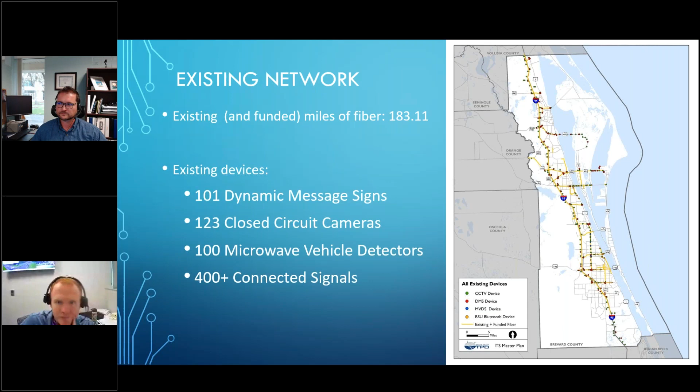That's just a quick overview, but I have a video here that will do a better job of explaining ITS and some of the things that could be coming down the pipeline than I do.

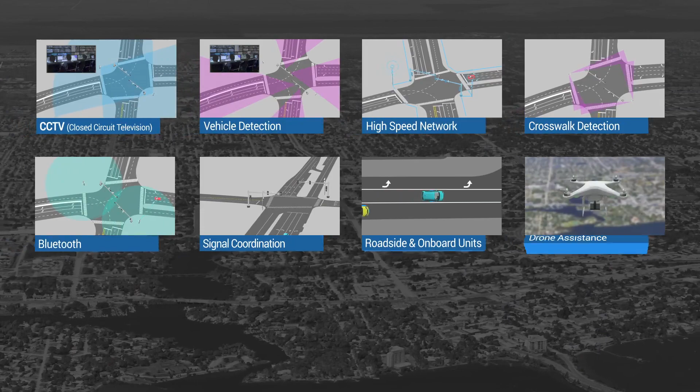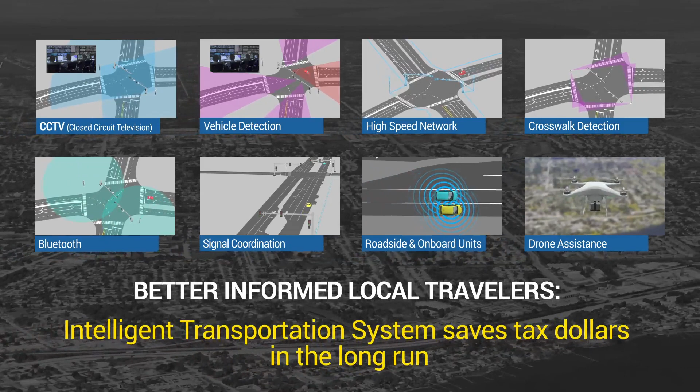Space Coast Transportation Planning Organization here with some technorific news about the current state of our area's growing intelligent transportation system, and how our tax dollars can transport us into a safer, more money-saving, and connected future. All of the intelligent transportation technologies we'll see, current, coming, and future, enable our local travelers to be better informed and make safer, more coordinated, and smarter use of transportation networks while saving money, fuel, and time. Most importantly, our intelligent transportation system will save our local tax dollars in the long run. We'll look at the technologies that are currently deployed, the new tech that's already on the way, and some future tech that's truly game-changing if we choose to adopt it.

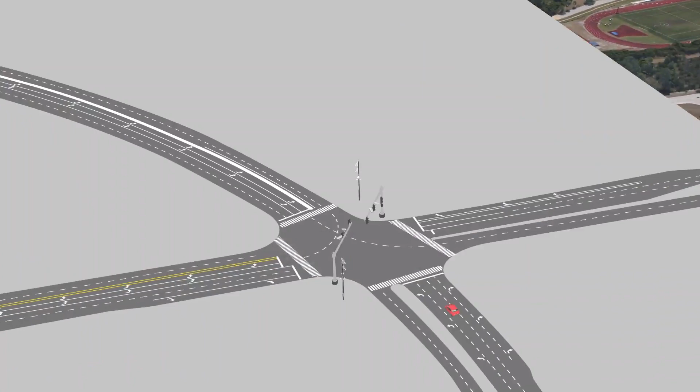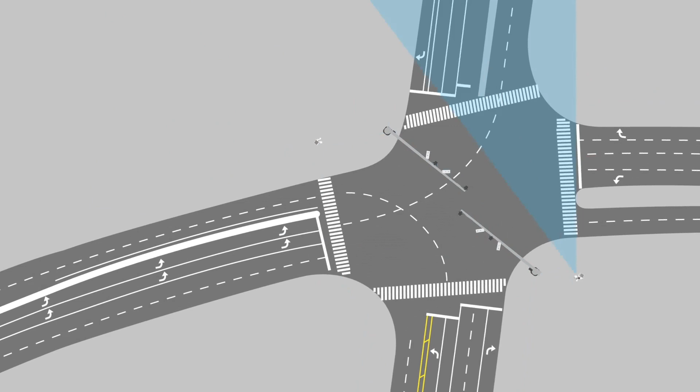Let's take a little trip to a local intersection and look at the technologies currently deployed there. Here, we see the intersection of Pineda Causeway and Wickham Road. Let's look at our already deployed closed-circuit television, known as CCTV, and vehicle detection sensors working alongside the high-speed network beneath our feet, and then add in the future possibilities. There's more to our intelligent transportation system than meets the eye, as CCTV allows traffic management staff to get a real-time look at traffic flow and watch for accidents. Vehicle detection with its special sensors automatically detects the presence of vehicles and obstructions on the roadway and instantly warns the management center.

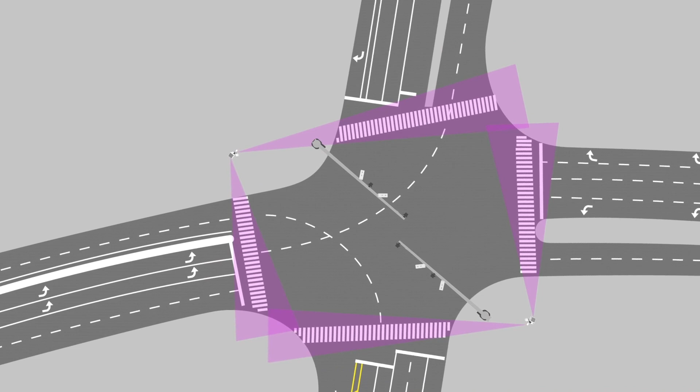Meanwhile, our already on the way crosswalk detection software will use similar vehicle detection sensors to check for people in the crosswalk and warn oncoming traffic day or night and in all weather conditions.

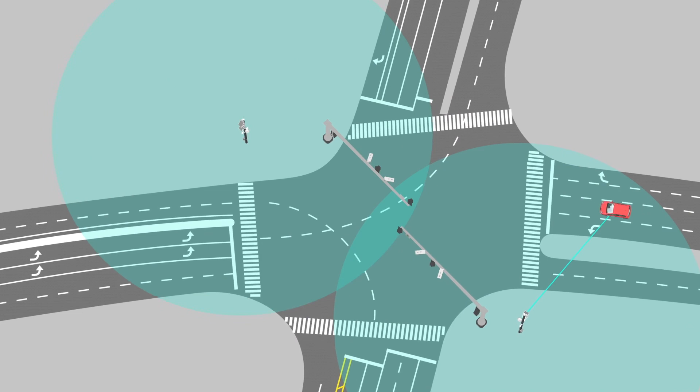Now let's add in some other existing possibilities like Bluetooth technology, which can detect the speed of vehicles entering and exiting the roadway. The Traffic Management Center now not only sees the intersection, but has much deeper traffic flow data to use for safety and roadway improvements.

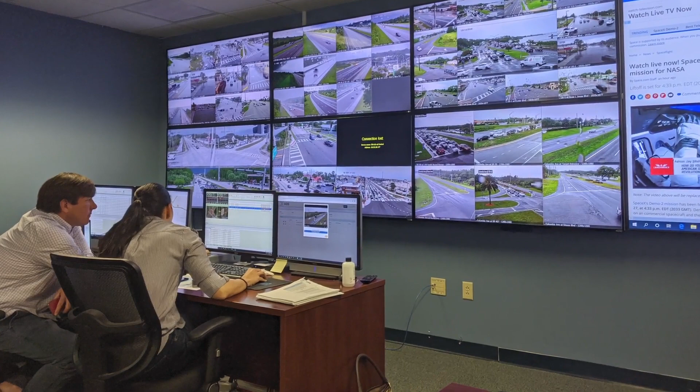Speaking of traffic management centers, our new traffic management center is being envisioned as we speak. We're really excited about it. It's the brains of this entire operation, after all.

Let's travel to another location and look at some more future possibilities. This is the intersection of US 192 and Hollywood Boulevard. In addition to the technologies we've already seen, this intersection employs another modern technology called signal coordination.

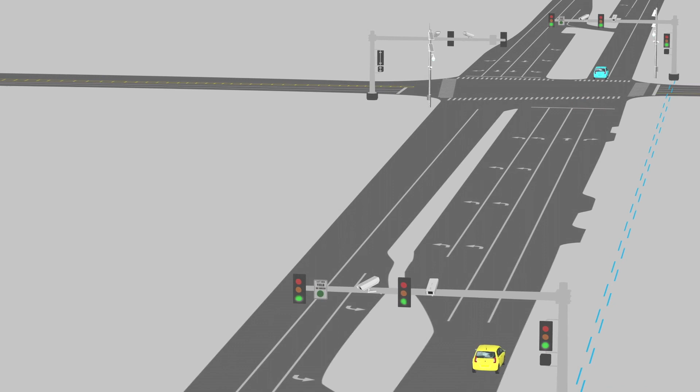Signal coordination uses the vehicle detection sensors to allow other intersections upstream and downstream to communicate with each other and work together to predict traffic flow and adjust the signals, improving traffic flow and saving travelers even more time and money.

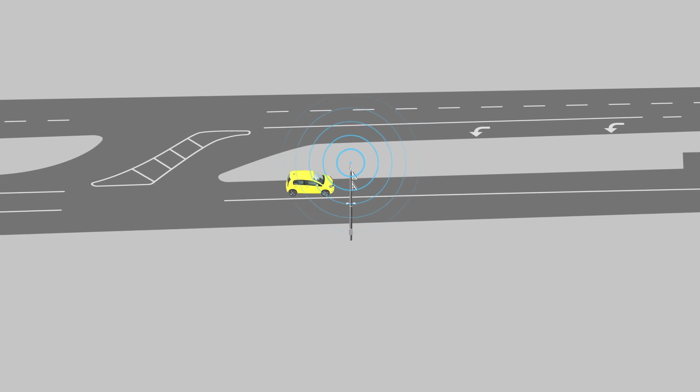With the addition of roadside units, direct communication with vehicles becomes possible, providing instant traffic notifications like red light wait times. And with onboard units installed in vehicles, the possibilities are even greater, as vehicles could then communicate directly with each other and the surrounding infrastructure, increasing travel efficiency, safety, and hopefully less road rage.

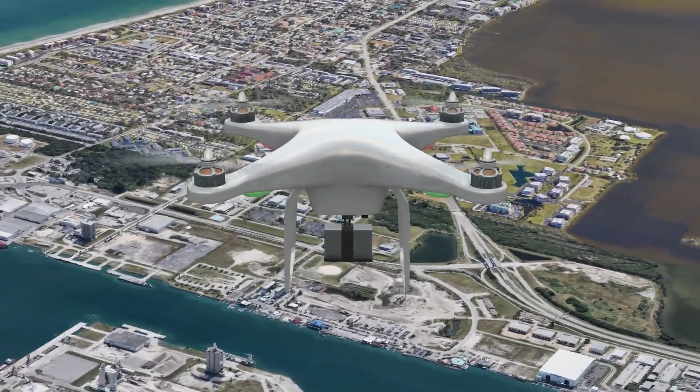And of course, high above the hustle and bustle, next-generation drones could not only ferry our online purchases, but provide first responders a bird's-eye view of accidents, or even provide updates to your smartphone about foot traffic at a concert, festival, or rocket launch. Of course, new technology is an investment.

Our hardware must be updated, maintained, and secured in order for future components to integrate seamlessly, in the same way that we wouldn't hook up a supercomputer to a dial-up internet connection.

In the present and in the future, all of these technologies acting together increase safety, optimize our existing infrastructure, and save taxpayers time and money.

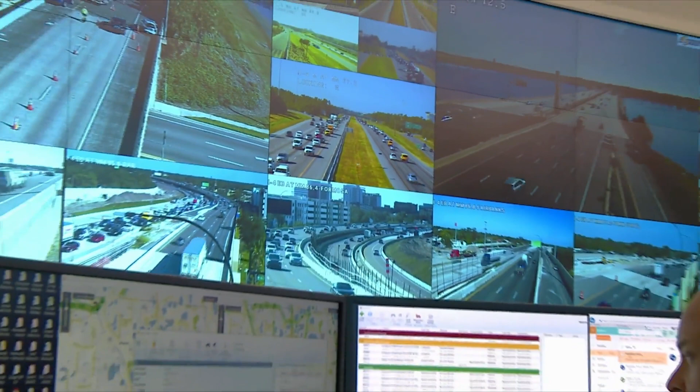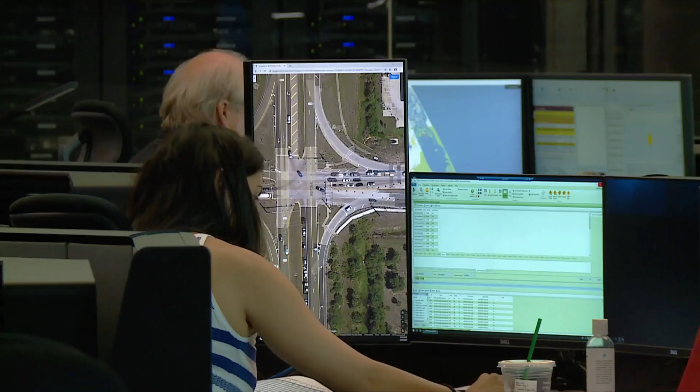24 hours a day, 7 days a week, operators at the RTMC monitor traffic conditions on 795 miles of freeways and state roads. Live feeds from hundreds of traffic cameras and data sensors provide information on traffic flow, average speeds, travel times, and incidents. If a crash occurs, the RTMC operators work to minimize congestion and secondary crashes by quickly

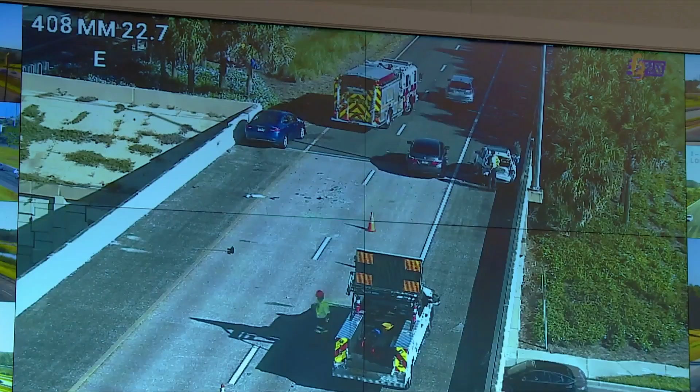dispatching road rangers and communicating with police, firefighters, and medical responders. When there is an incident on a major roadway, drivers may detour to arterial roads. The RTMC operators have the ability to adjust traffic signal timing, keeping the traffic lights green longer to help facilitate the increased volume of traffic.

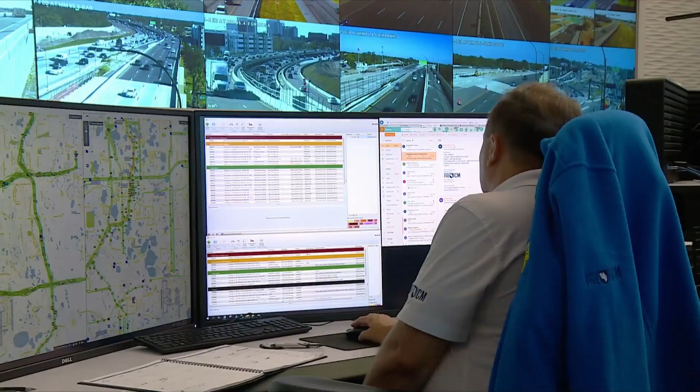Using the latest technology, monitoring the roadways, keeping drivers informed, this is how the Regional Transportation Management Center is making our roadways as efficient as possible. For more information, visit cflsmartroads.com.

Videos are great, especially for the public to get a good idea of everything that goes on in easier ways. So that's another video that can be shared.

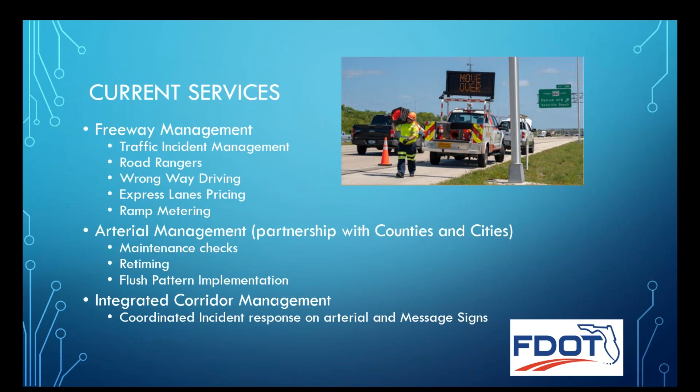I think you're still muted there. Thank you, sir, I appreciate that. Sorry about that, guys.

So going ahead and taking a look at the services that we currently offer from the Traffic Management Center, we generally break this down into three different categories: freeway management, arterial management, and then integrated corridor management.

On the freeway management side, really the bread and butter that began the program was incident management. We share information with FHP, they share CAD information and let us know when they see crashes. We use our cameras and sensors on the roadway to determine where crashes are actually occurring, then share the video back to them to help dispatch the right equipment to the right location. You'd be surprised how often drivers indicate they're on the wrong side of the roadway, or how often they send us information that they may be miles off from where they're actually located.

For especially severe crashes, we coordinate to close ramps in order to bring fire responders in potentially from a wrong-way direction, so they can access the incident safely. By keeping an eye on the roadway, we're able to coordinate and quarterback a lot of the work going on in terms of incident command.

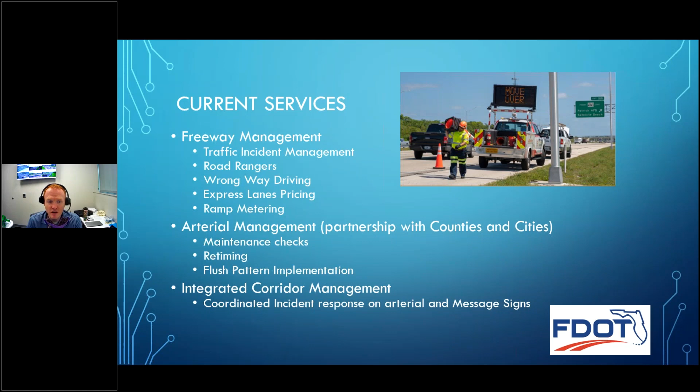So I mentioned all this happens through partnership. We go ahead and work together on a regular basis. We share communication. There's actually some slides in some of those presentations that talk about that high-speed connection between it. I don't get any information from traffic signals directly, I get all of that through the other TMCs. And then when we look at getting information about what's going on the freeway, that comes from the department over to the local agencies.

We go ahead and also share software. So I don't have my own license to things, they don't have their own license to things. We share things amongst each other in order to make it more efficient, more cost effective for the public.

The other thing that we really have done is been able to share lessons learned when we're deploying this new technology. As you can imagine, as many times as you may have tried to go ahead and set up new technology at your house, it's the same kind of condition. There's lessons learned in each deployment about what we can and can't do, and we get together and make sure that happens regularly, making sure that we're all learning the lessons one time rather than having to do it with each new project or with each new agency. Do you want to go ahead and jump to the next one, Stephen?

When we start looking at emerging technology, some of that was in Stephen's video talking about connected vehicle. That's one of the biggest things that we've looked at investing in from the FDOT side. We've already set our center up to handle the data management, so we've been able to scale out to have enough server space in order to take care of this. For a comparison, our old center used to have around 4 to 5 racks of space. The new one has around 35.

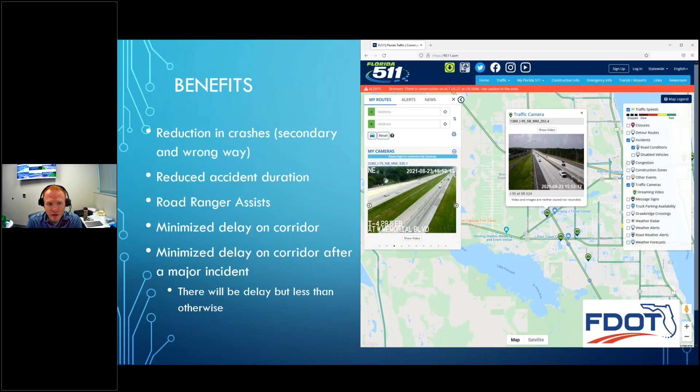When we start looking at the challenges we face, certainly all of this work is complex and it's an ever-changing environment. As you've seen, we try to put mitigation measures in place through regional communication, and by making sure we're making strategic investments in the right technology.

One of the challenges we've seen, not just statewide but across the US, is staffing. You have great staff here with the local agencies, but being able to retain that staff and making sure they pass on knowledge to the next group coming in is a key factor in keeping these systems up and running. None of this technology runs itself. It takes a very qualified professional to keep it moving, and oftentimes it takes a team to make these things happen.

The other thing you look at is that TMCs in the past were built with siloed roles and responsibilities. As those have forked out and there's more and more we can do with technology, you have to make sure you're looking at a center built for the future, one that considers emerging technology and handles those expanded roles.

Sorry, Stephen, you want to jump to the last slide? If you want to learn more about what's going on within FDOT, we've got a lot of information on our website, referenced in the video: cflsmartroads.com. We try to put as much information as we can and provide access to the data being captured by these centers so you can see it for yourself. With that, I'll pass it back to Stephen. Thank you all very much.

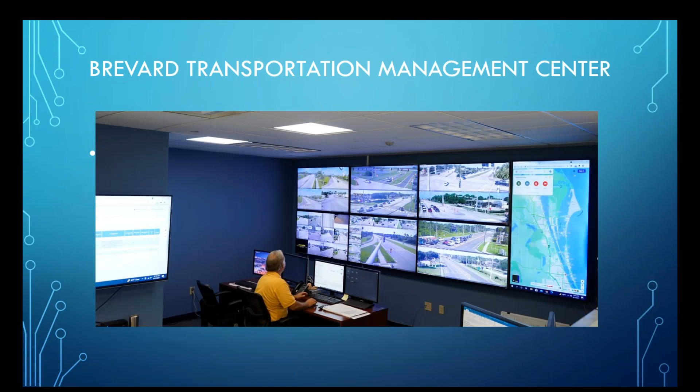Great, thank you, Jeremy. As you can see, there's a lot that goes on behind the scenes at the regional level. Now getting down to the county level, we'll hear from Mr. Rich Adaman with Brevard County. He is the Intelligent Transportation Systems Operator and Network Systems Administrator. So Rich, take it away.

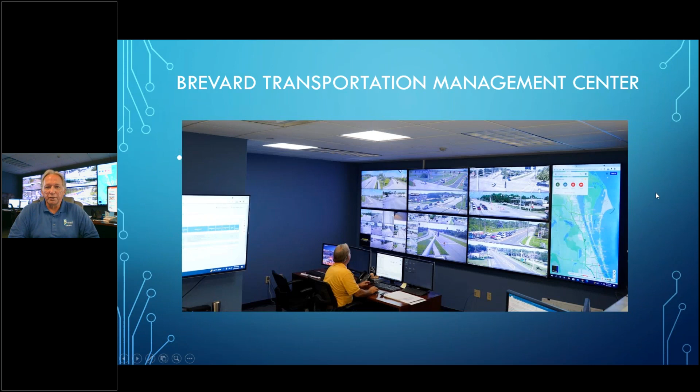Good morning everyone, thank you Stephen, and thank you Jeremy for the great information you provided. Jeremy touched on a lot of great points, and I'll be reiterating some of those. I really appreciate the partnership we have with the local municipalities along with the DOT. I'm going to give a brief overview of our signal operations and also our TMC operations.

Brevard County's traffic operations service area is from Mims to Sebastian. Brevard County is 72 miles long, covering 1,554 square miles total, so it's quite a bit of area to cover. Our signal shop group is currently located in Merritt Island, although we're moving to a new facility, hopefully in the November-December timeframe, which will be on the mainland. So we'll get off the barrier island and have a better area to work out of, located right around the new Pineda overpass, Pineda Causeway.

Currently our signal shop group has 8 folks working within it, with 2 additional positions currently open. Those positions break down to 4 field signal technicians, 1 field supervisor, a warehouse bench technician, a locator technician, an ITS technician, and 2 vacant field signal positions. At our Viera TMC, we currently employ 1 traffic engineer and the TMC operator, which is myself. We also have consultant support, as folks come in from time to time to work on a variety of different projects, so the TMC gives us the opportunity to have those folks in and take care of things as needed.

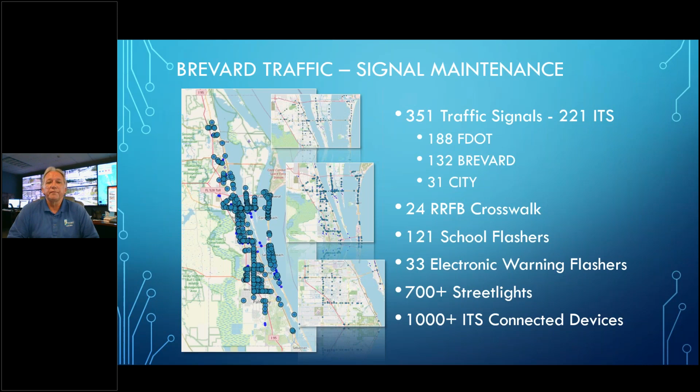We also maintain 24 RRFB crosswalks, the rectangular rapid flashing beacons you see driving down A1A, and each crosswalk can have 2 to 4 beacon types. We maintain 121 school flashers, which are speed warning flashers that advise motorists of a school letting out, and 33 electronic warning flashers, which are speed warning or curve flashers you see in the roadways. We have over 700 street lights that we maintain throughout the county, and 1,000+ ITS connected devices, such as network switches and so forth.

We provide traffic signal operations. Our primary focus is public safety. We are here to keep all the infrastructure running correctly and make sure our motoring public has the best possible experience driving our roadways.

The group maintains all of the traffic infrastructure and repairs. We also do equipment testing at the shop. These folks also do all of our preventive maintenance at all the locations.

We are first responders, and during storm events, our folks are out on the roadways before most anyone else to make sure the signals come back online and everything is operating as best as possible in normal conditions. We do have a 2-hour or less response time that we adhere to. We want to make sure we have the signals operating as soon as possible, so all the technicians are geared up to do any repairs as quick as possible.

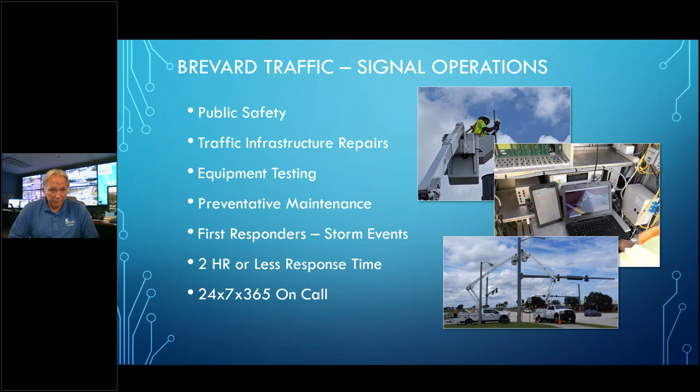We're also a 24/7, 365 operation, so we have an on-call technician available every single day. They're dispatched after hours through the EOC, and they respond to issues that arise, whether it's a cabinet knockdown, a traffic signal in flash, or even a bulb out at nighttime. So we're available all the time to make sure these systems are running correctly.

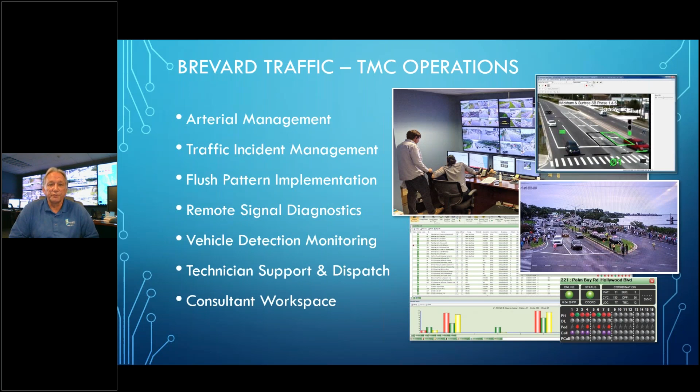Some of the success stories I can speak about: recently, in the last couple of years, we implemented a real-time electronic work management system. This has allowed us to put equipment into the technicians' hands and provide much better documentation. It allows us to see real-time what's going on at each location as the signal technicians respond to issues, or even just day-to-day operations, logging and tracking the information.

So our iWork system allows us to very quickly identify issues that may have happened in the past, or understand what's going on in the field in a real-time environment. And that has been one of the pieces that has allowed us to continue to grow and maintain a higher level of service with all of the infrastructure that we have.

We've also employed a central management system for our signals, which is our ATMS.now. For all the connected ITS traffic signals, we are able to access the physical controllers, understand how the signal is operating, pull reports on the signals, and manage them in real time. This has also been a real benefit for us.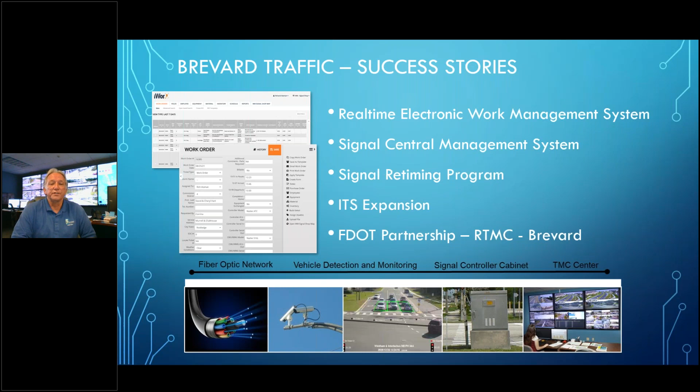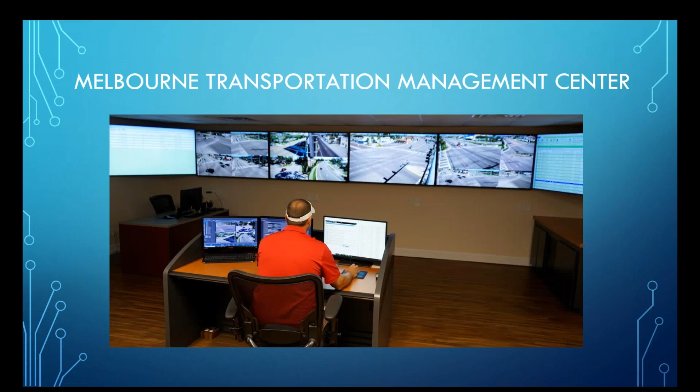I'd like to thank the TPO for having me as a speaker, and I definitely want to compliment Rich and Jeremy on their production, they did a really good job. I think Rich has covered a lot of what we do already. I'll try to stick to what we specifically do that might be a little different, or our day-to-day operation.

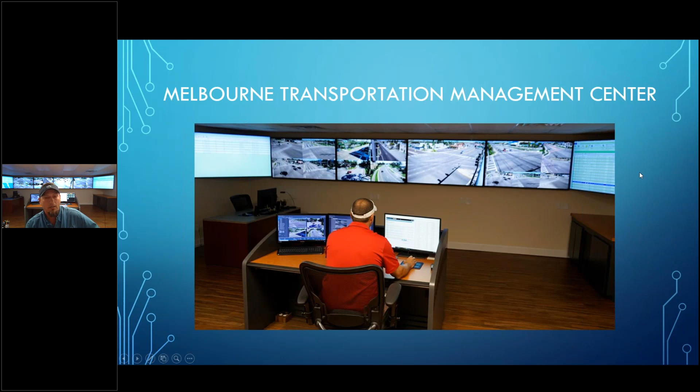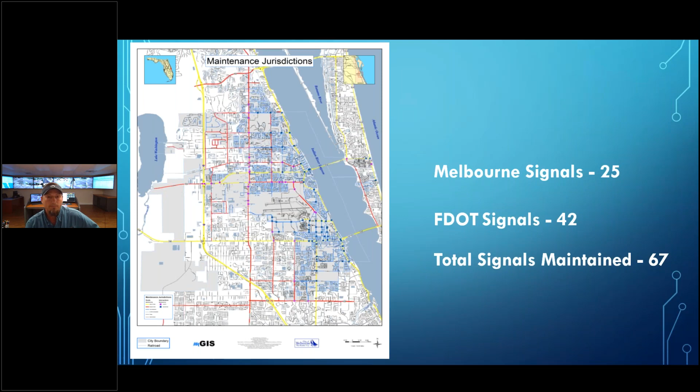As you can see, there's a map up right now that Stephen has pulled up that basically gives you our maintenance responsibilities. We have 25 traffic signals within the city of Melbourne that belong to the city. We maintain 42 signals for the state, which is a grand total of 67 traffic signals. We are a smaller agency, but it gives us the opportunity to have a well-managed system.

So if you want to go to the next slide, Stephen. Okay, I'm going to speak on our day-to-day operations. Typically our day starts with firing up the TMC. We do a general overview of the network. We look to make sure we have communications to all our 67 signals. We check the PTZs, make sure everything's operational, traffic's flowing. We also check our alarm screens.

We run a real-time check, as most TMCs do, of our detection systems. Basically what we're doing is trying to catch any vehicular detection or pedestrian detection failures or faults. If we see that, those get dispatched to the 2 technicians that we have, and they'll go out and diagnose the issues. The goal is to resolve the issue as soon as possible so that motoring traffic are not hindered on their way to work, school, or wherever they may be traveling.

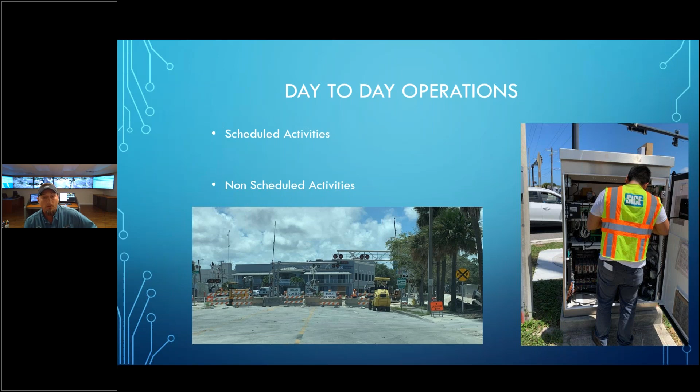Every day we have scheduled activities that are just a day-to-day given. Those are basically PMs of the traffic cabinets, monitoring signal projects, construction projects, whatever we have going on. Right now we have some signal projects going on, as well as the rest of the county, and we have an ITS expansion project going on currently. It does require the maintaining agency to monitor these projects quite regularly, because that ensures we're going to get a good product. Most contractors are trying to do that, but every agency has their forte, so to speak. So that's pretty much our day-to-day operation.

I'm going to speak on our successes here at the City of Melbourne. We've been very successful with the retiming efforts. I think they date back to about 2015, maybe prior, but every 3 years the traffic signals here within the city, the main arterial roads, are retimed by a consultant. Sometimes that's a joint effort with staff involved as well, with questions or concerns by the consultant. This effort is to basically optimize the traffic flow throughout the City of Melbourne and even into the county signals.

We also built the TMC that you see behind me in 2019. That was a joint effort with our facilities department and staff in-house.

We've been struggling with keeping up with the network when it comes to the wireless side of things. So as this ITS expansion project is coming aboard, it's giving us the opportunity to have more real-time alarms. We can make changes on the fly. It also allows us to optimize the traffic flow on the arterial roads when we do see an issue, specifically right now with the Brightline train. It's thrown some curveballs at us, and with this TMC and the technology we've been able to implement, it has given us an opportunity to be more prepared for those kind of situations.

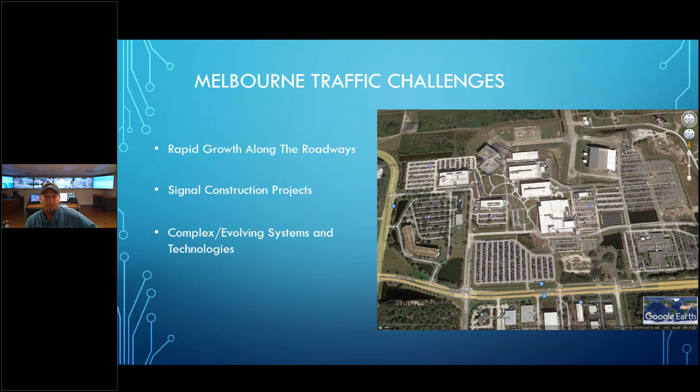I'm going to move to the next slide, Steve. The keys to Melbourne's future success, as has been emphasized today, are the ITS expansions throughout the county and the city. Those are all going to be vital for the technology and for success with the local agency and FDOT's initiatives.

We currently have a lot of wireless communication, but wireless is also susceptible to the environment. So we are making plans to upgrade to a better, more robust wireless system throughout a lot of our traffic signals. But we also have to fund that, so it takes time, and sometimes the funding doesn't come for two to three years. That's where relationships with FDOT and the Transportation Planning Organization, the TPO, can help a lot with enhancements. Local agencies really appreciate that connection, because sometimes funding isn't available through our internal network, so we have to get it from outside.

That's where those relationships become important - being connected with our local agencies, like working with Brevard, finding out what their goals and initiatives are, and communicating back and forth so that if somebody's doing something over here, it could help you, and you can put that in too. A lot of that's going to be huge in the future.

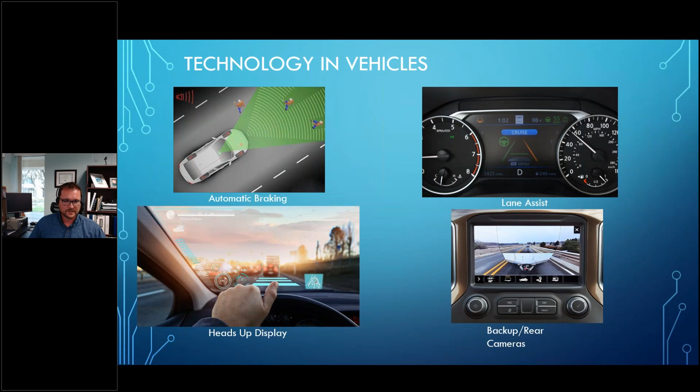And so their vehicles are getting smarter, and so we need to make sure our infrastructure gets smarter as well, so we can continue to make everything run efficiently and safely.

One of the key things that Rich mentioned in helping with this transportation future is having a new transportation management center. The county is currently funding design, it is underway, we're still looking to fund construction. It's estimated to be around $10 million, and it's number 2 on our TPO project priority list.

And so the TPO is looking to be housed in this facility as well. We really want to utilize the data and the collaborative environment with all the agencies to be able to come work under one roof to help analyze where there's issues and maybe be able to help with planning of the future funding that our partner agencies need.

So some of the future success factors, there's a lot of work still to be done. All of our local agencies have done a great job and continue to do so on a daily basis. But in order to really be ready, we need to work on getting our local operations committee going so we can have more of one voice of what our needs are as a county back up to DOT and to our TPO. Continue to prioritize maintenance and operations. I think we heard staffing levels 3 times in each person's presentation.

So we're going to see what we can do to help support that, as well as those regional initiatives that Jeremy touched on. DOT has done a great job at establishing a framework for us all to work off of and common goals to work towards.